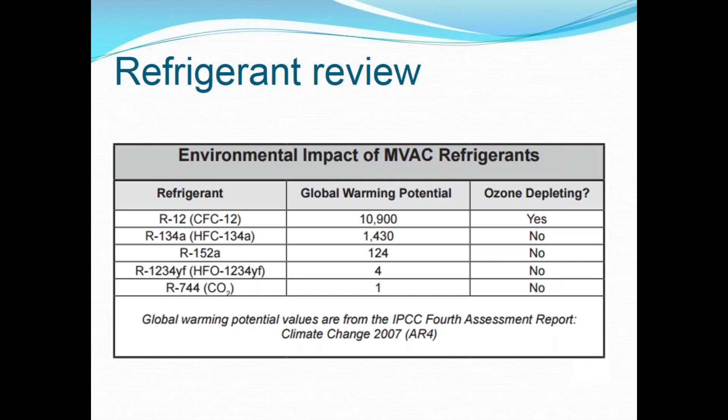But to give you an idea of the timing and diversity of applications, one manufacturer had R1234YF in only one of its models at the beginning of this year, while another had it in all of its vehicles. By the end of 2017, again, most all manufacturers will be using YF, which I'm going to just refer to it as tonight at times. But when I say YF, I mean R1234YF. So let's take a look a little bit at the status with it.

Cylinders per SAE standards and things through the Air Conditioning and Refrigeration Institute have to have markings so that they're clearly known to what type of refrigerant is in it. So in the case of 1234, it's a white cylinder with a red band on it, the red denoting that it's got a flammable nature to it. And 1234 does have a mild flammable trait to it, and that's why it's marked as such.

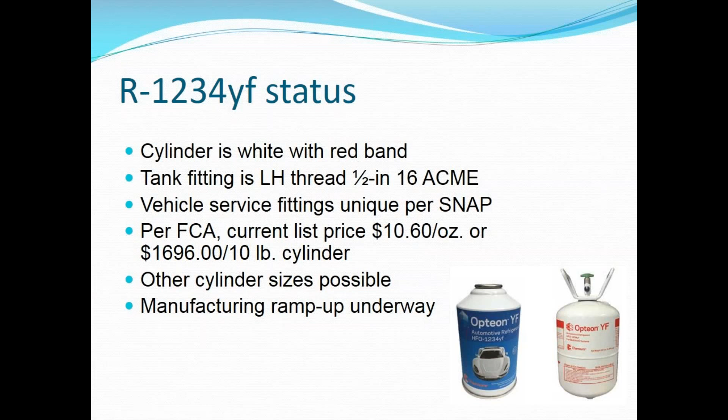So what about R134A? Well, unlike R12, if you remember that when we made that transition to 134, that was really a phase out, basically to stop using that chemical altogether. And with 134, it's more of a gradual phase down. So it's really going to be around for a good while yet. In fact, I would just say that, for the foreseeable future, it really is still going to be a 134A service world.

Now, per EPA, they ruled on this. Cars for the United States market will no longer be able to use 134A refrigerant by the model year 2021, for a factory fill at least, but that doesn't mean that they can't get 134 to service it. So you don't need to worry about that. We will probably see the price of 134 start to go up, kind of a teeter-totter thing here, where 134 will go up and 1234 shall eventually drop again because of the manufacturing numbers increasing. So again, 134 is going to be around for a good while yet, so it's not going anywhere.

The manufacturers can still use 134 in cars for a few years longer that are destined for what they call narrow use markets, and those are developing countries. But as far as the US, that's going to be at 2021 for 134.

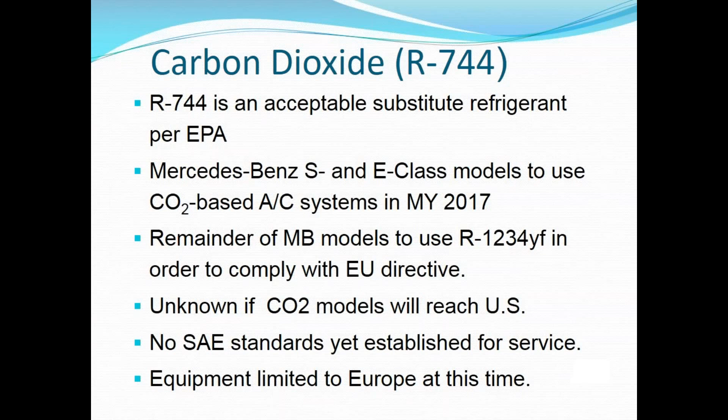One of the inherent design features that's in 1234 systems is the use of an internal heat exchanger. It's basically a line within a line that allows heat exchange between low temperature refrigerant and high temperature refrigerant. And really what it does, using this coaxial type of design, is it actually causes a little bit of an increase in efficiency, because typically 1234 systems lose somewhere around 5 to 8%. They're not quite as efficient as a 134 system. So with this, they're able to make that back.

Now, these have been used to some degree on 134 systems for extra efficiency, but it's really a design feature now that's going to be inherent to 1234 systems. And it's too early to tell at this point, but who knows, IHX diagnosis of this certain line or how it might affect things going into the future, it could be a potential troubleshooting scenario with this new line design.

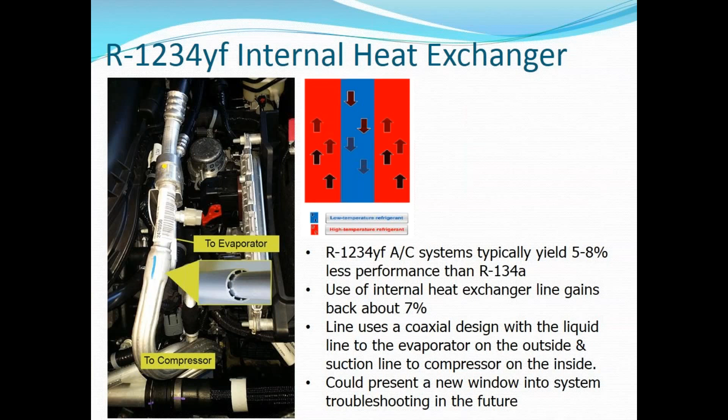One thing that's come really into focus now with these smaller systems is system charge accuracy. So don't know how long you've been working in this industry, but I can certainly remember, and many people can remember, that topping off an air conditioning system, dropping maybe a pound of refrigerant in it, or half a pound of refrigerant routinely just to get it to cool better was a commonplace thing.

Well, really, that's kind of hard to do anymore, because if you look at what you see on the screen here, an old, like a mid-80s Cadillac with 56 ounces of R12 refrigerant in it, a 2-ounce charge error is 4%. That's not such a big deal. But now when you put it in a newer system that maybe has only 12 ounces in it, you're looking at a charge error of around 17%. You can bet that starts to make a difference in the thermal efficiency of that A/C system. So really get ready for this.

Start to look at these systems in a different light, because even though they do have smaller charge amounts, they also are sealed better than those older systems that we mentioned earlier. We're talking about captive seals, a lot of things that really make these systems much more tight than anything we've ever experienced before. And that feature of sealing that system tighter is something that a manufacturer can get credits for as far as the greenhouse gases go. So it's kind of critical. It's good for the owner of the vehicle because it's less A/C maintenance. For you, it means that you've got to be much more precise in what you do, and guessing by golly just isn't going to get it done anymore.

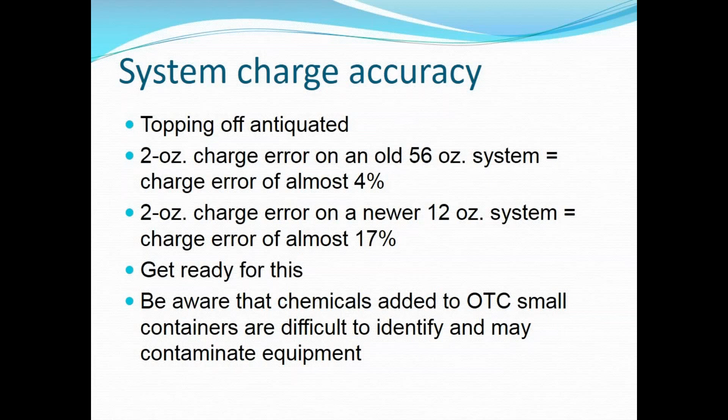And then also I just want to mention that chemicals that are added to over-the-counter small containers can be difficult to identify and may contaminate equipment. They can contribute to swelling of seals in compressors and cause other problems. And there are a lot of these on the market, so it's something to be aware of when you're thinking about servicing a system you may not have seen before that has maybe a quirky past in terms of its service and what's been done to it.

Okay, a little bit about 1234 compressor oil. So all 1234 vehicles require a new type of oil, okay? So you can use 1234 YF oil in a 134 system, so that's backwards compatible in that respect. But you can't use a 134 PAG oil in a 1234 system because they lack the acid reducer. So keep that in mind.

And then also, some compressors have their own unique requirements above and beyond just the fact that it might be a PAG oil. So there might be a specific subset. So it's always best to check with the manufacturer to see what their recommendation is. Of course, with hybrids, because of the insulating capabilities, POE type oils are the recommended application there.

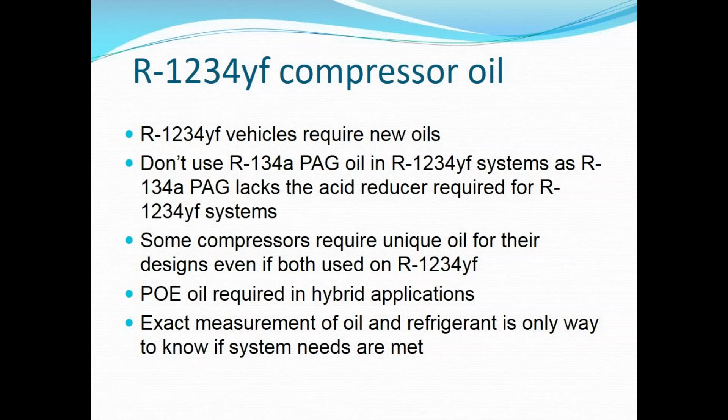And just like with refrigerant, exact measurement of oil is, again, a precision type of operation on these smaller charge systems. So where you routinely used to just dump oil in a system when you replace a certain component isn't really the way to do it anymore.

1234 YF equipment for refrigerant recovery and recycling is supposed to meet SAE J2843. And there was some equipment that went out and met the early version of J2843. But the problem with it was that if the refrigerant was contaminated, the machine wouldn't block the recovery of that refrigerant. So if you're shopping machines, you may want to talk to your equipment rep to make sure that your equipment meets the latest standards. Can't emphasize that enough.

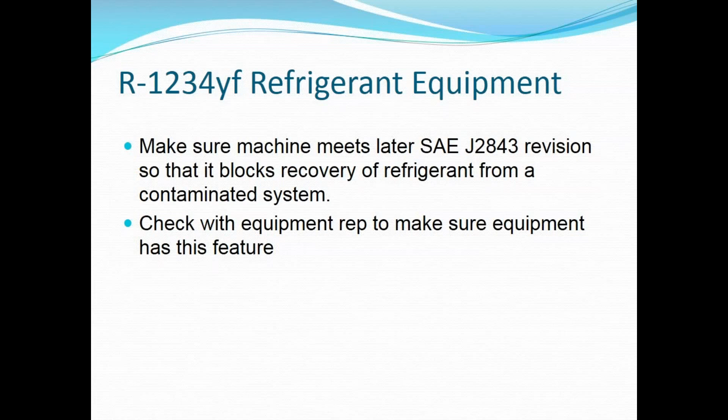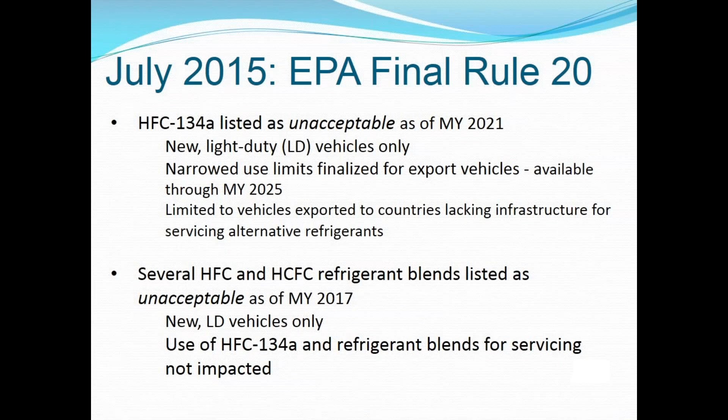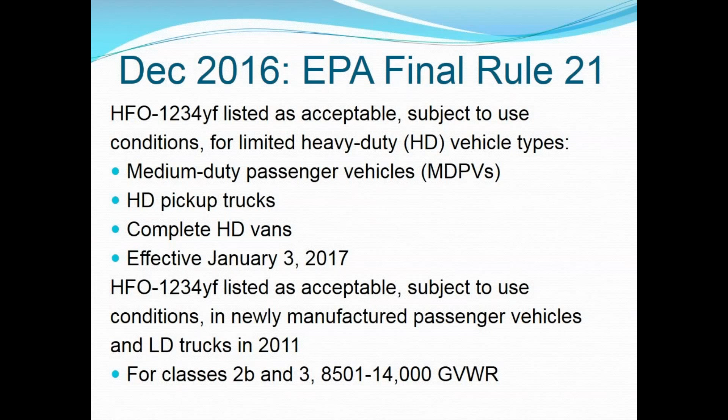Okay, now let's move to something a little bit more recent. In December 2016, EPA issued its final Rule 21. And essentially what this comes down to is that 1234 is now acceptable for use in limited heavy duty vehicle types, MDPVs, pickup trucks, HD vans. That's effective January 3rd of this year. And this is not big, like Class 7 trucks. This is for the heavy duty in those particular classifications with a GVWR of 8,501 through 14,000, classes 2B and 3. So that's that. Pretty straightforward.

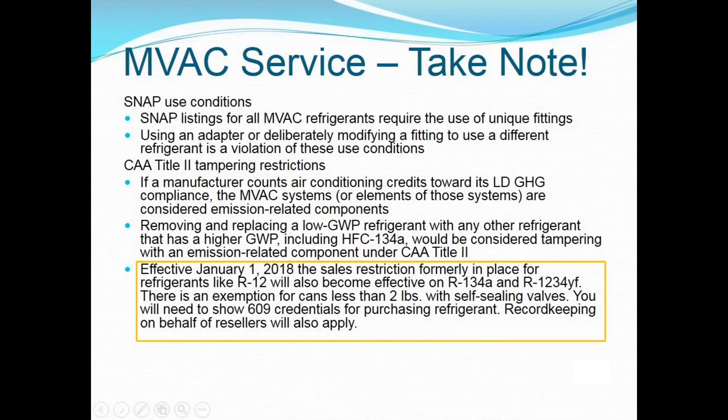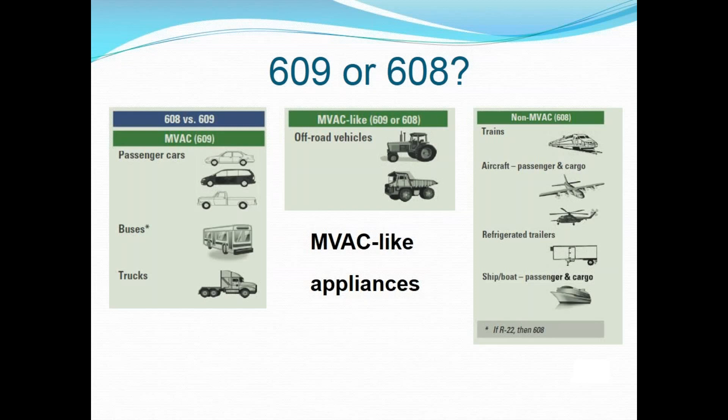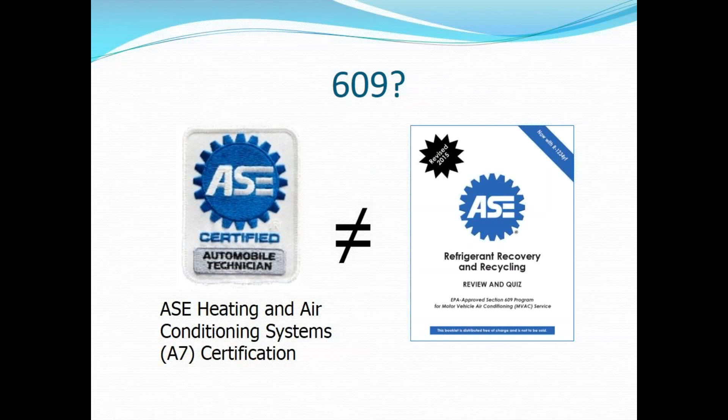Okay, so what's new in our program? Well, our big revision was in 2015. I mentioned that earlier with one of the callers. And then as these laws have changed and crept out little by little, we've added some minor revisions in 2016, and we've got another one going in place right now in 2017 to include the essence of rules 20 and 21 that we already talked about.

We have updated refrigerant status charts in there because obviously those rules affect them, and a notification of the sales restriction that we just talked about. Again, January 1 of 2018, you've got to have a 609 credential for the purchase of refrigerant, and you've got to have one anyway to work on motor vehicle air conditioning under federal law.

So our program is available. Easiest way is online at our learning management system site at asecampus.com. You get an instant credential online. That's good for 60 days, and then we will send you a permanent credential by mail in that time.

We also have a voucher program, which are electronic coupon credits that you can buy in bulk, which is kind of a real handy thing that we see with employers, some government agencies, and so on and so forth. You can also get a printed booklet where you can request it at ase.com/CFC, and the cost is $19 per candidate.

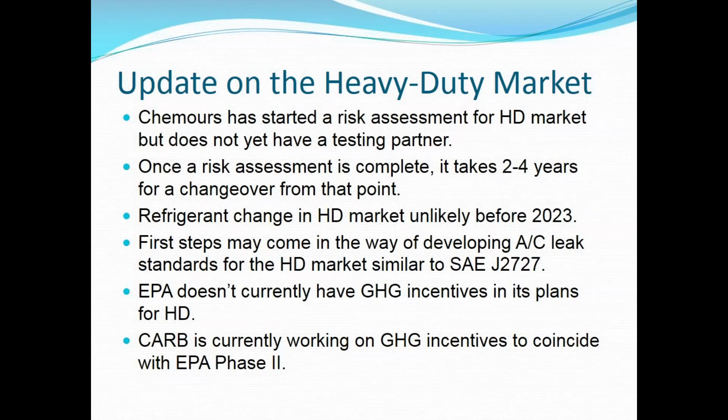So as we move towards the adoption of Phase 2, CARB may go one measure further than what EPA is doing by actually giving truck manufacturers an incentive if they were to switch to a low GWP refrigerant. So that's nothing in stone. That could be a future direction, and we'll try to keep our eyes on that and keep you updated if it moves that way. That's pretty much it on that.

So with that, that's pretty much the guts of the presentation that I had. And Dan, I don't know if we've got any trends in the questions we're seeing. Dave, I think you should just spend a minute. I know we can't really talk about this, but spend a minute because there's some concern about the smaller than 2-pound cans and DIY issues. Do you want to speak to that?

Yeah, I can speak to it. I'm sure it's causing some concern out there, and that's been an issue. It's been discussed in different forums throughout the industry. Hasn't sat well with people. But here's what I'm going to say about it, and something to keep in mind, because there's two elements of that 2-pound can.

I mean, sure, it enables a DIYer to do their job. But remember that when somebody buys that smaller cylinder, it's predicated on a history of topping off an air conditioning system, which, with these systems being much tighter and better designed, may not be the problem whatsoever. It might not even be low on refrigerant.

It could be a control system problem, pressure switch, so on and so forth. It may even have an air conditioning problem that could be tied into the MIL light being on; that shared data is causing the A/C system to shut down because something isn't right. All those sorts of things.